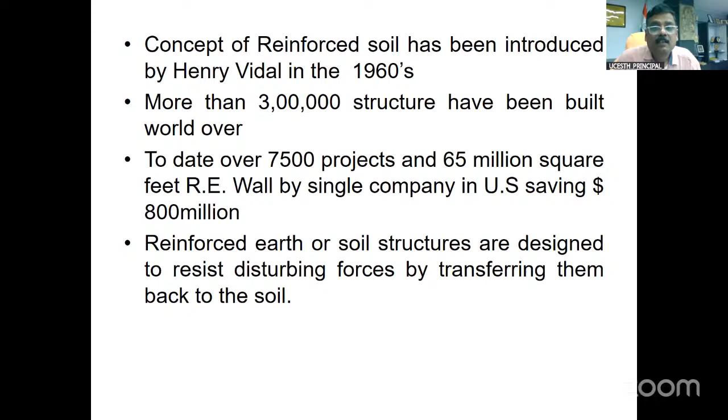Another beauty of the reinforced structure is, if there is slight damage, we can just repair it. Whereas if you go for a conventional gravity retaining wall or cantilever wall, if it fails, you have to remove and reconstruct it. Thereby it has gained more popularity and the attention of engineers all over the world, and it has been extensively used throughout the world.

That's reinforced soil structures, and most of you know about the Outer Ring Road project also, the Hyderabad Outer Ring Road project - they significantly used reinforced soil technique. Now, I want to emphasize, even though it is conventional, I want to see what is the level of safety.

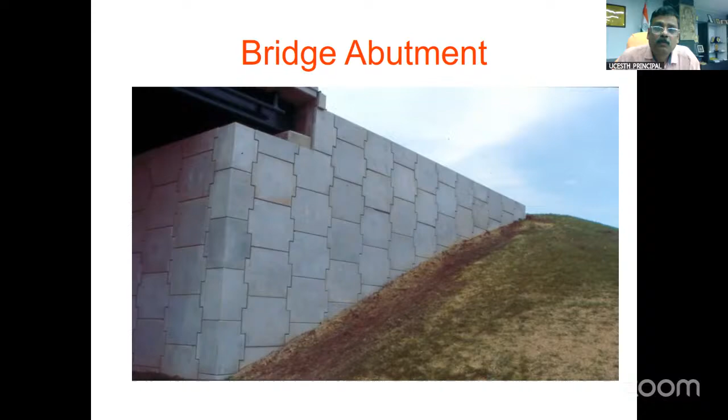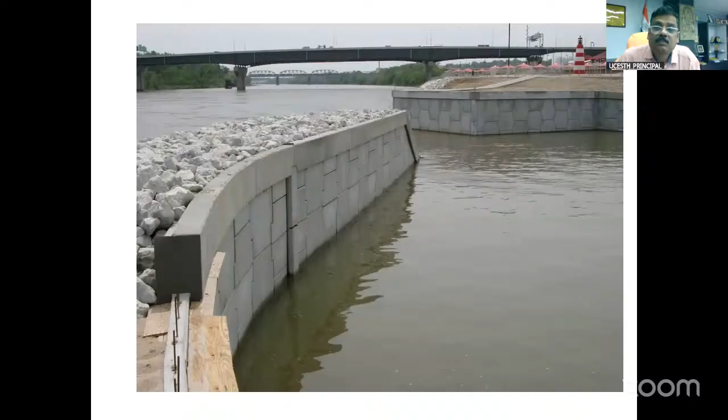So just some of the structures, the beautiful structures which we can see all over the world. These are some of the reinforced soil structures which were existing, and we can construct almost vertical, as sir has said, whereas it is not possible in conventional construction, especially flyover ramps - those approach ways were all reinforced soil walls only. So these are some of the beautiful structures. Just before going to the actual topic, I would like to show these photographs so that we will have a glimpse of the reinforced structures. They are extensively used.

Just coming to the design, generally we will go for external stability and internal stability. External stability is almost similar to the design which we use for conventional reinforced retaining structures - factor of safety against overturning, sliding, bearing capacity failure, and deep-seated failure. Now, in addition to external stability, in reinforced soil walls, we will go for internal stability, that is tensile failure and pull-out failure. These are the two failures generally we have to be safe against.

So I am emphasizing this with a different approach. Generally, if you see almost all the textbooks, there's a conventional way of designing. I will go in a slightly different way now.

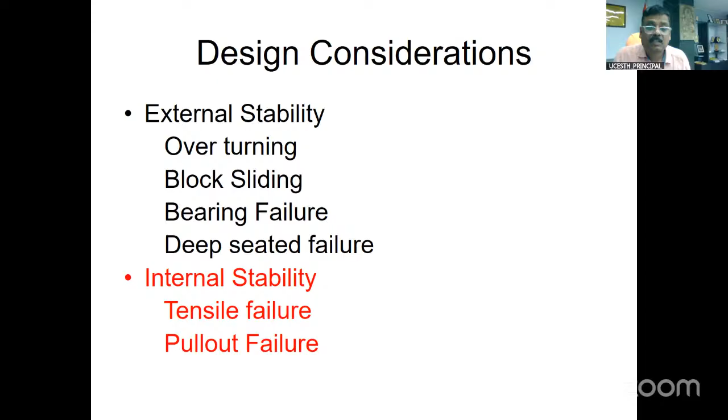So we'll see - if you see the axial pull-out mechanism, we assume that while designing, the reinforcement comes out axially, and based on that, bond resistance will develop above and below the reinforcement. These reinforcements may be strips, geogrids, or geotextiles. Of course the better one is geogrids, where you get passive resistance also. In case of geogrids, the shear failure will be slightly above the geogrid, so you get more resistance. The interface friction will be more - almost we take phi r equal to phi, that is interface friction equal to angle of shear resistance.

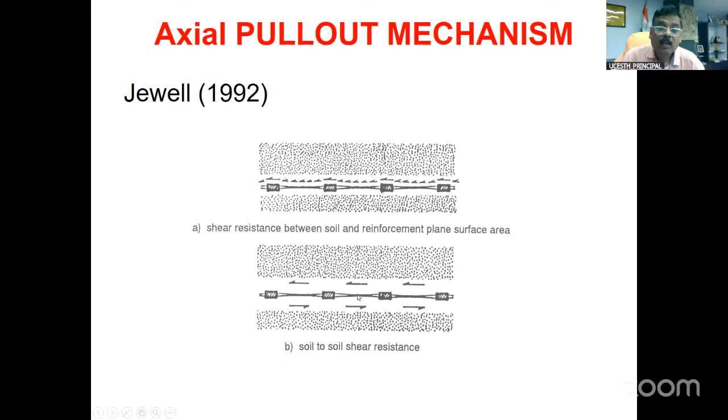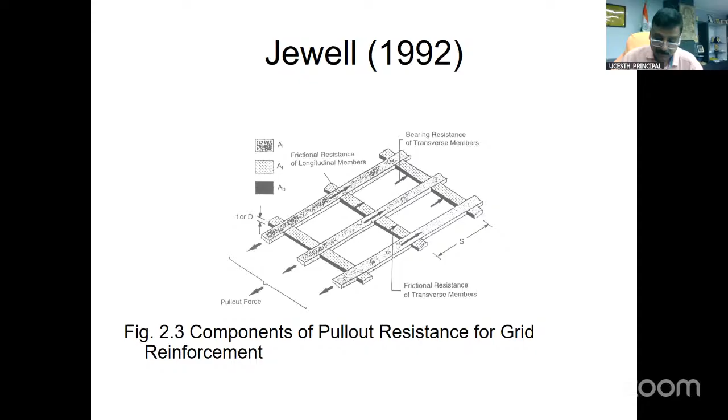Whereas in geotextile and other materials, we maximum take 2/3 or 3/4 of phi. So in addition, you get passive resistance in the case of geogrids - that's why it is always advantageous. In 1992, Jewell presented that additional passive resistance will be there in geogrids. So, in addition to bond resistance, this bearing resistance also will be there, which significantly improves the factor of safety - which in many cases is not considered.

Now I want to give a glimpse of the factor of safety. Just now at the beginning of this lecture I presented the Kobe earthquake in Japan and Northridge earthquake in US. Their magnitudes are almost Richter scale near 8, and in one case more than 8 - a major devastation. Even then, the reinforced structures, which were not even designed for seismic force, were also intact with minor peeling of facing panels, something like that. So then it attracted us, and we focused on doing research on these aspects.

Then we studied why so much factor of safety is there, and when we analyzed, we found - let us say if the failure plane is something like this, the slide will slide downwards. So here this reinforcement will be pulled downwards, not pulled horizontally. Thereby you get an oblique resistance. Let's say if you take a paper and keep it on a table, and keep some weight over it - if you pull horizontally, you can apply less force, but if you want to pull downwards, you need to apply more force.

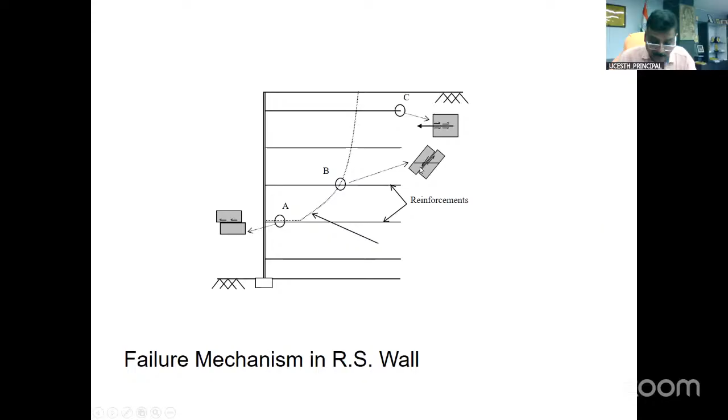That is the oblique effect, which generally no one considers. That's why when we consider this, there is a significant improvement. Here is an example which shows in case C this is an axial pullout, whereas in case B, oblique pullout will be there - that is the main contributing factor.

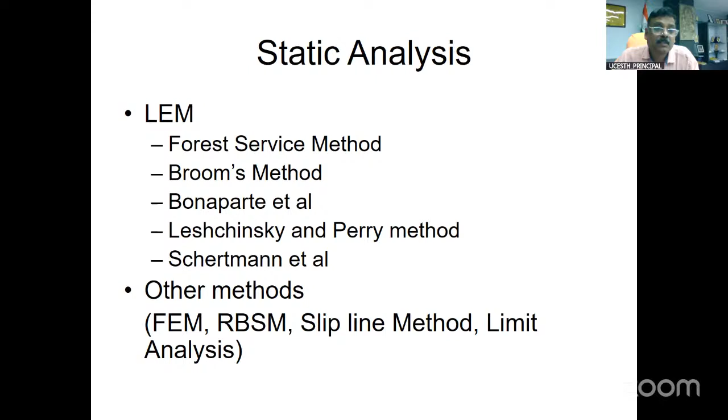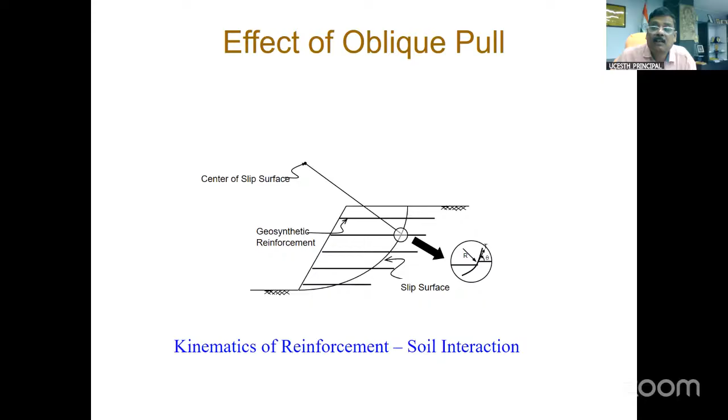Another factor of safety we found is that if you use geosynthetics as reinforcement, mostly geogrids nowadays, they have the elongation property. Because of that, it is giving additional factor of safety. So these are the two main reasons contributing to the factor of safety being much higher than what generally we are assuming.

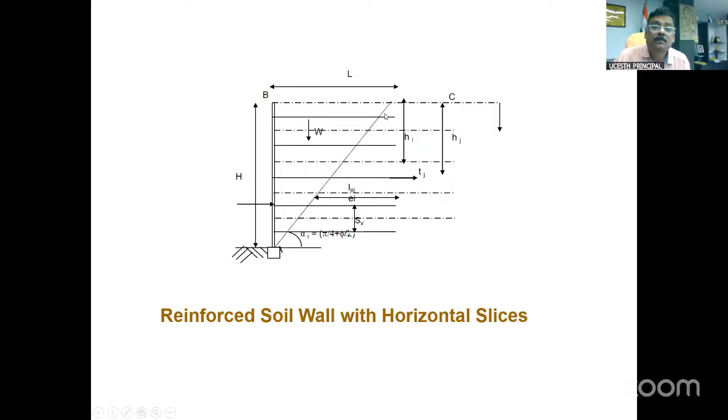For this, typically in geotechnical engineering we use a vertical slice method. Here we used a horizontal slices method. This is the top slice, the thick solid line indicates the reinforcement, and this dashed line is one slice. So we divided this into a number of horizontal slices, with reinforcement in the middle of each slice, and then it is analyzed.

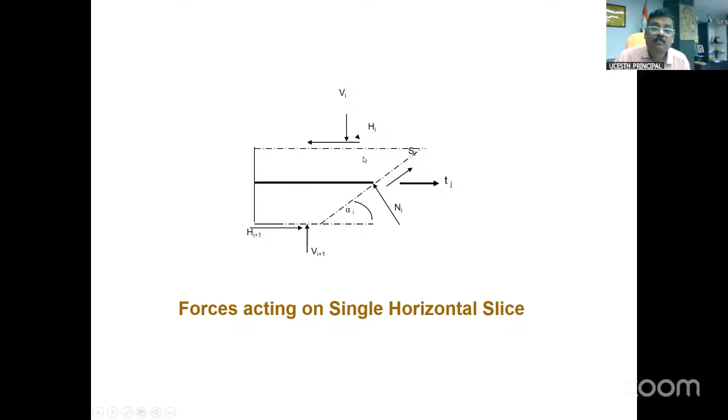So this is one slice, and here is the reinforcement. It is subjected to horizontal pull, and normal force, shear force, all the forces acting on it are resolved by taking the algebraic sum of vertical forces equal to 0, and the algebraic sum of moments equal to 0. For the whole wedge, this is the resistance we are getting from the slice.

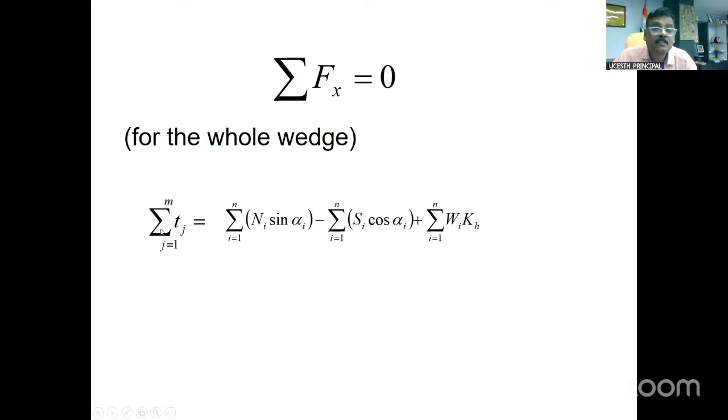That's slightly different from the vertical slice method. So this is the bond resistance we are getting, and this equation indicates the tension mobilized in the reinforcement. This is the maximum bond resistance we are getting.

Using this, we are finding a factor. This is the maximum bond resistance - if there are so many m layers, we sum up all the layers' bond resistance divided by the mobilized tension, and you get the factor of safety. It is easy to calculate.

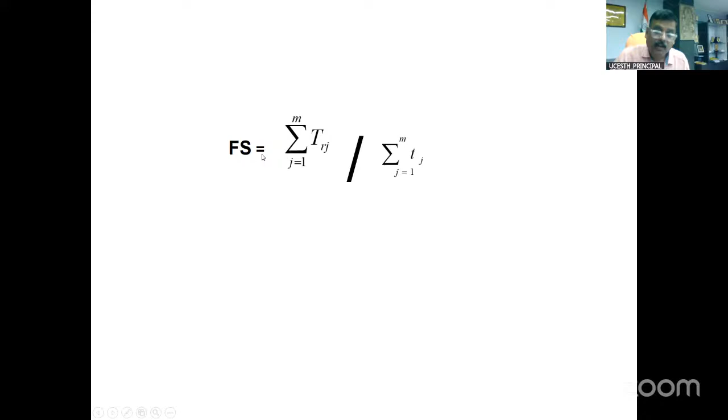Further, generally we use a factor of safety where mu indicates relative stiffness, and WL - let's say if a wedge is sliding, it's about to fail, so we take WL/L as 0.001. So phi R, and N is number of layers from 1 to 5, and for length of reinforcement, generally we go for 0.7H, but we tried from 0.3 to 0.8H, to see how it varies.

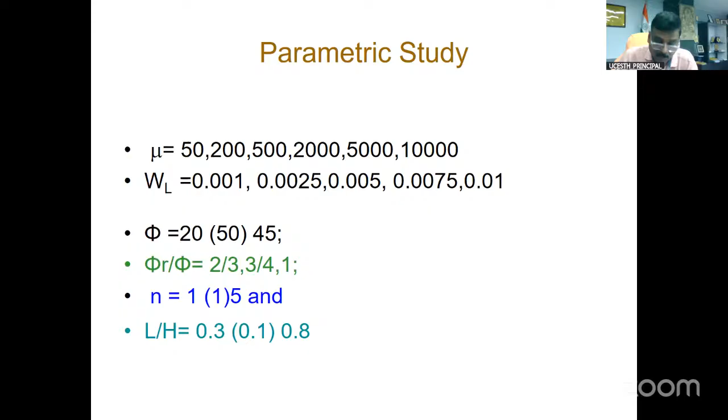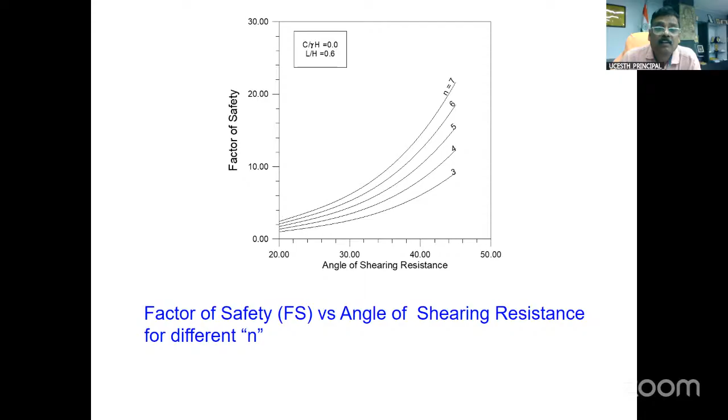If you take L by H as 0.6, which is generally widely used, even at an angle of shear resistance of 30 degrees, the factor of safety you are getting is almost 5, which is much higher than 1.5. Generally we design for geosynthetic reinforced soils: for steel strip we take a factor of safety of 3, otherwise for geogrids we take 1.5. But here we are getting much higher, just from the bond resistance point of view.

Now another case: let us say if there is a little bit of cohesion also, how does it affect things. Generally we avoid cohesive soils because drainage is a major constraint. If more cohesive soil is there, it swells and induces lateral pressure on the retaining wall, which can damage it. That's why we try to avoid such backfill soil, and even in conventional retaining walls we try to go for cohesionless soils.

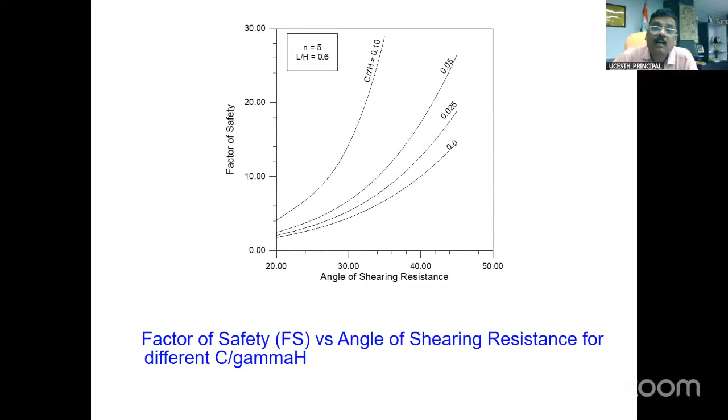But nowadays sand has become very expensive. If there is a little bit of cohesion, like red soils, which come under SM or SC category soils, you can still make use of that. That's why we have emphasized that even with a little bit of cohesion, it still works well.

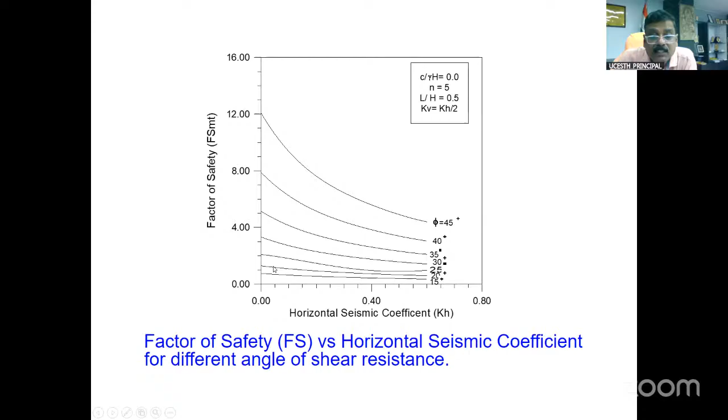We also tried with seismic coefficient ranging from 0 to 0.8. 0 indicates no seismic force, which we call the static case. In the other case, if seismic activity is there, a seismic coefficient of around 0.4 to 0.5 corresponds roughly to a Richter scale magnitude of 6.5. So you can imagine how much reduction there will be. Even after accounting for seismic force, you still get a factor of safety significantly higher than what is required.

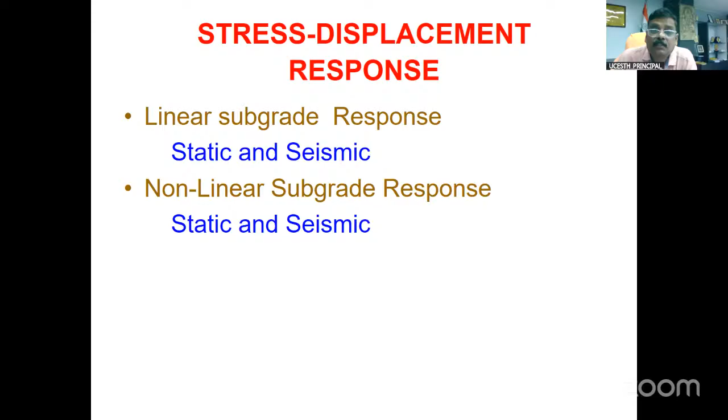Coming to the next case: analysis of inextensible sheet reinforcement subjected to a transverse force and displacement. Here we analyzed slightly differently, considering two cases for the stress-displacement response: linear subgrade response and non-linear subgrade response.

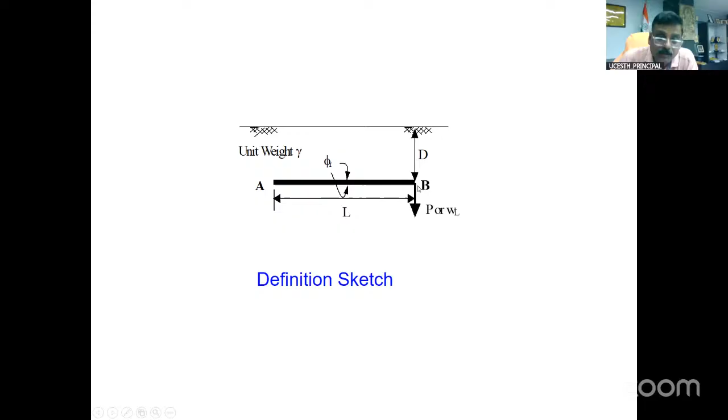For this, let us say a reinforcement layer AB is subjected to a downward pull P, and WL is the deformation - how much it deforms just after the load is applied. This definition sketch is based on that. When deformation occurs, the reinforcement bends; originally it was a solid line, it becomes a dashed line. Of course this image is exaggerated, but this shows the concept.

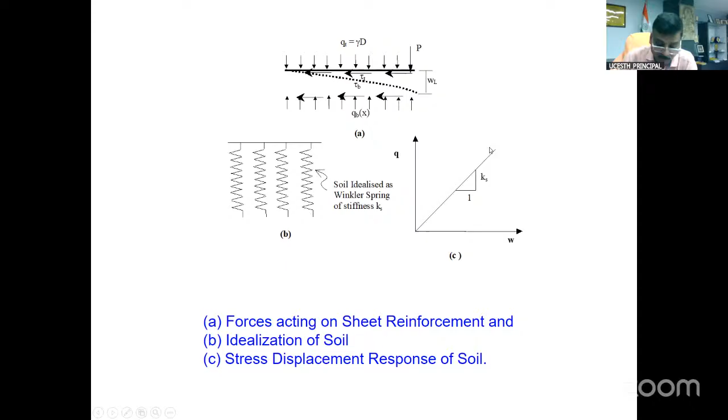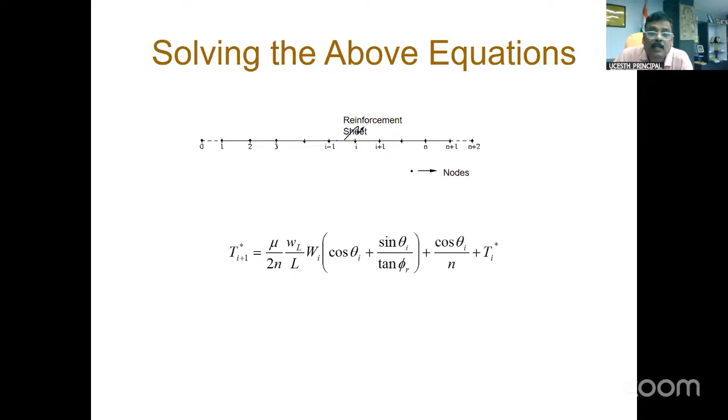Here the stress-displacement response of the backfill soil is considered as a Winkler spring, so stress displacement is assumed linear - this is the initial assumption. We calculated the forces accordingly and developed the equations, but I'm skipping those since they look boring; let's focus on the end results.

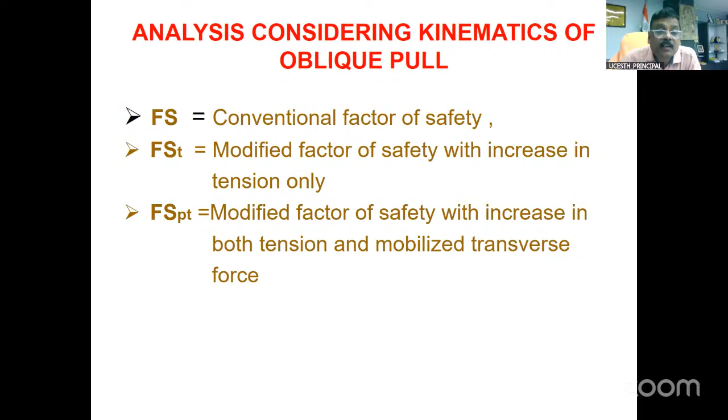Finally, there are three factors of safety. One is the conventional factor of safety, assuming only axial pullout. The second, which we discussed earlier, is FST, the modified factor of safety considering increase in tension or bond resistance. The third is FSPT, where we consider the upward force - because as you pull the reinforcement downward, the failure wedge moves downward in an inclined fashion, creating an upward force. If you consider that this counters the downward force, there is a significant improvement, which is the third case, FSTP.

So much of a factor of safety is there. But we need to remember there are certain failures which we will see in newspapers and other things, where the major cause of excessive deformation or creep is due to wrong selection of backfill soil.

So there are certain mistakes which are done practically, and a few reinforced soil walls have failed in recent years, mainly because of wrong selection of backfill. But that doesn't mean we should be careless. Here the factors of safety you can see for different cases.

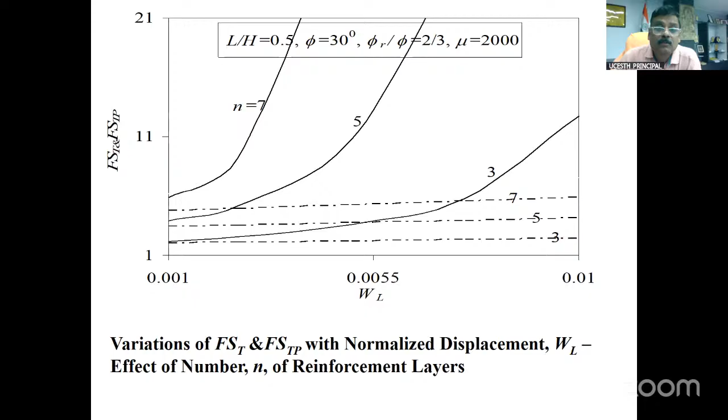So if there is any deformation, there is so much increase in the factor of safety. If it deforms, there is an increase in factor of safety, in addition to the bond resistance. Here I didn't consider the actual passive resistance which mobilizes in the geogrid. In a geogrid, there will be apertures, and inside the aperture, passive resistance is mobilized. So here I considered geotextile reinforcement only, just for geotextile, and these are the factors.

If you see, the pullout force due to transverse displacement is very, very significant here, when you compare it with only the axial pullout. In axial pullout also we consider bond resistance, but the additional bond resistance which we are considering is... I will go back, sorry.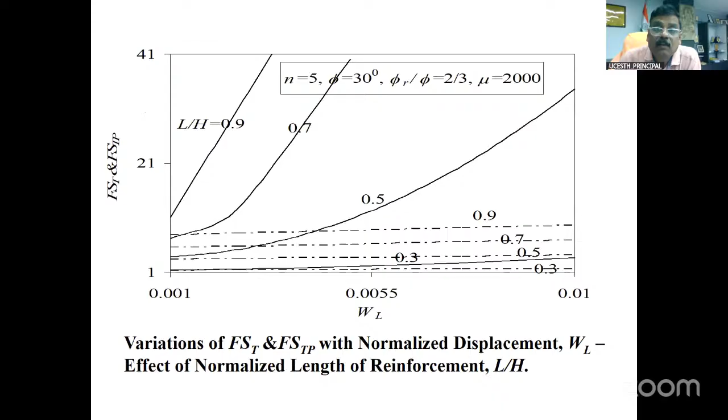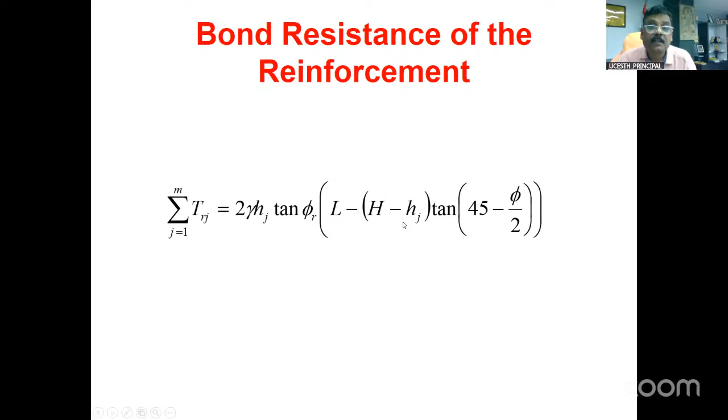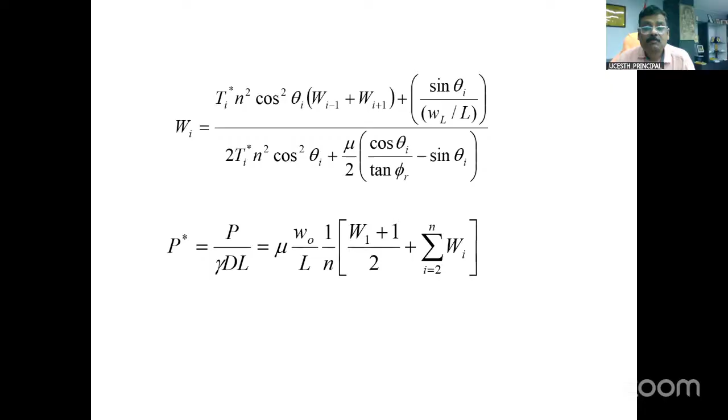So here, for this bond resistance, we add the upward normal force into tan phi r. That is the additional bond resistance which we get. Because of that, we are getting more resistance, and that's why so much factor of safety is improving. This work was done by one of my PhD students, and we got awarded for it about 5-6 years back.

This is significant, and the main reason I chose this is that nowadays in almost all departments they are extensively using reinforced soil walls. The factor of safety that a design engineer generally considers is only the axial pullout. If you consider oblique pullout, there is a much higher factor of safety.

This I am emphasizing, not to be taken for granted, provided the backfill soil is a granular soil, that is, the phi is greater than 30 degrees. Always you will get much higher than that.

If you search in Google, you will find the Kobe earthquake and Northridge earthquake case studies. Almost all conventional retaining structures collapsed, almost 80-90%, even though they were designed for seismic forces. Whereas reinforced soil walls or reinforced embankments, which were not designed for seismic force, or designed meagerly for a horizontal seismic coefficient of just 0.3, withstood seismic forces of 0.6 or 0.7 horizontal seismic coefficients. That attracted us, and then we focused on this.

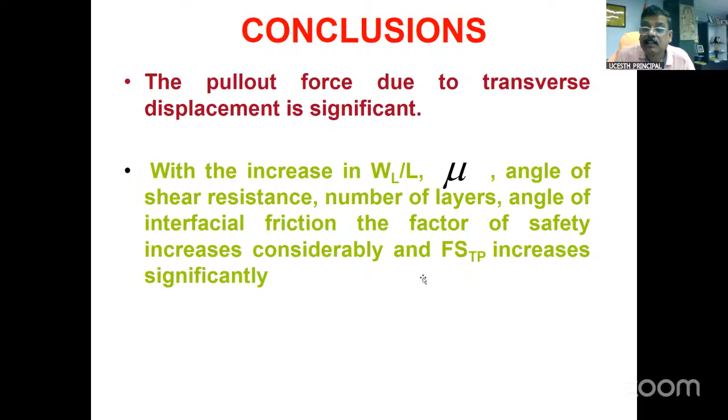But here there are numerous structures which are much more than 20, 30 meters. There are so many structures all over, standing as testimony. Even the Kanakadurga temple, they used a parking lot constructed by a reinforced soil wall, more than 43 meters or something like that. So these are some points I thought I would like to share with engineers working in different fields, which they can take with confidence. Any doubts regarding this, any questions, I'll be happy to answer, sir.

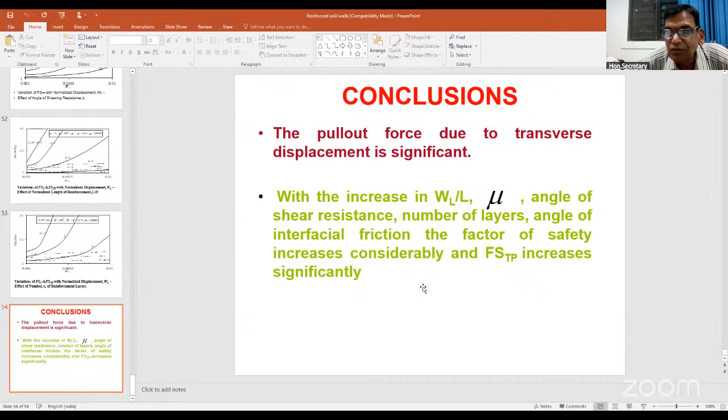Very important topic, now a requirement of the order of the day. Any engineer, whether irrigation engineer, roads and buildings department engineer, or public health engineer, everybody is going for reinforced soil walls, because you just told us it could be possible only with 40 meters height. The flyover in Kanakadurga could be possible because of this reinforced soil wall also. That is the only thing.

Another important thing is, not only structurally economical, but the other aspect is land acquisition, which is a big problem because in urban areas that much area will never be available, and with a conventional retaining wall we can never achieve that, it could be possible only because of reinforced walls. This is the order of the day. Almost everybody has dispensed with conventional retaining walls, whether it is a bridge, flyover, railway bridge, or irrigation dams and other things.

Sir, you have excellently given the genesis of reinforced walls in 1960 and subsequent developments, and displayed so many structures across the world about this beautiful reinforced wall technology. To my knowledge, sir, this reinforced wall technology started in combined Andhra Pradesh in Hyderabad, the flyovers, especially Paradise flyover and other flyovers, were the first built with reinforced walls. That was the first time, and everybody had a lot of discussion about how it would work, but they proved very successful. And now all these structures could happen because of this technology.